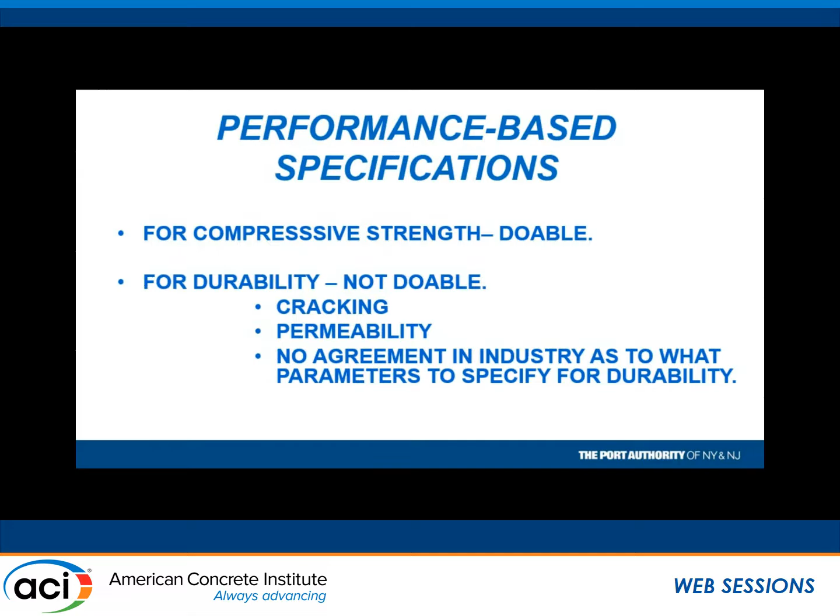I have not found a concrete producer that does any research into this. And they shouldn't—why would they be interested in researching this? They're interested in producing concrete and making some money. So I don't know where they would truly respond to a specification that deals strictly with durability.

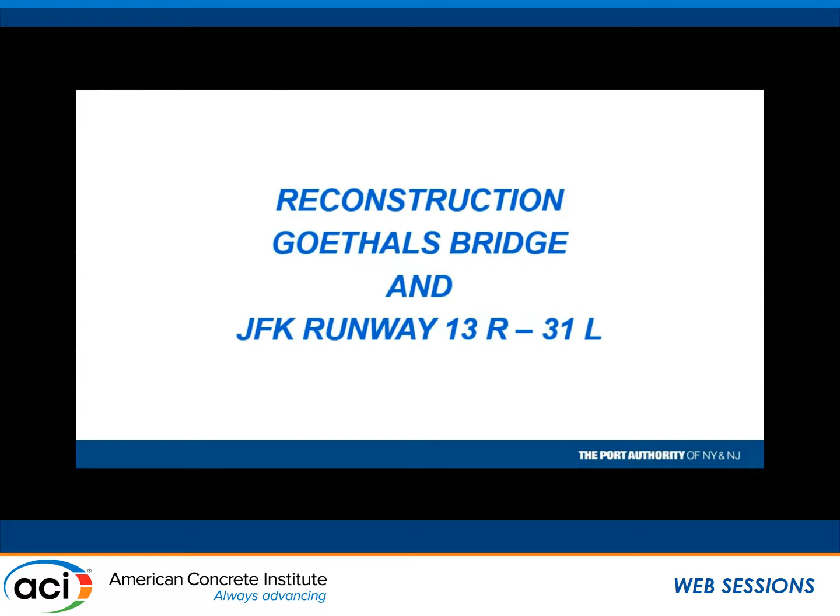So what I'm going to talk about today are two major jobs that we had recently: one was the reconstruction of the Goethals Bridge, and the other was the reconstruction of a major runway at JFK. The first one I'm going to talk about is the Goethals.

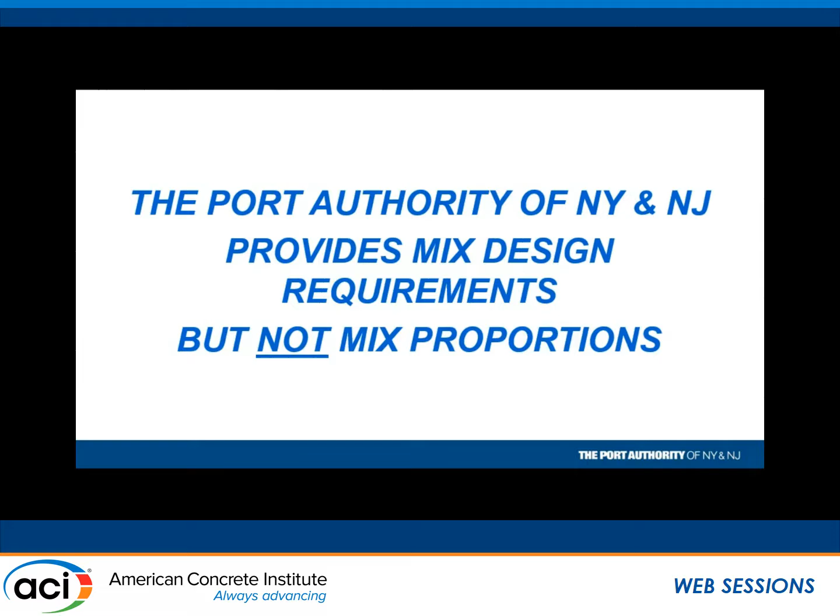Now, we do not give mix designs, okay—that we do not do. We do give mix design requirements. We do put the concrete producer on the hook. We do hold them responsible for what they produce. We even have payment reductions in our contract if we don't get what we want within the PWLs we give. But we do specify a lot more than what would be characterized as strictly a performance-based specification. And why? Because our life experience tells us that we get a better job.

So the Goethals Bridge was designed to have a service life of 100 years. Now, the bridge it's replacing has been in existence for 90 years. The reason it's being replaced is because of obsolescence—the lanes are narrow, we get a lot of accidents—so it's being replaced. The deck there is 90 years old.

So when we talk about getting concrete to last 100 years, people chuckle—oh, nobody's going to be around, ha ha. Whether it lasts or doesn't, who's going to know about it? Well, you know what? It's not a big to-do to get concrete to last 100 years. There's a lot of concrete out there that lasts 100 years. The sad part is that a lot of the concrete I see produced today, I wouldn't give you 2 cents on whether it would last 100 years, because of some of the nonsense we pull.

You go out there—you don't have to be a concrete expert to say, do you think this is going to last 100 years? Are you kidding me? But that's what we do.

Now, how do we get concrete to last 100 years? Talk about a bridge deck in the Northeast—a lot of de-icing chemicals, chlorides. We can't allow the chlorides to get to the steel. If we do, we're going to reduce the service life of that deck.

Now, how do we predict a 100-year service life? Well, we have these programs—ACI Life 365, right? Stadium. And what is it based on? Mostly diffusion characteristics and cover to the rebar. But you know what's interesting? They all ignore cracking. Cracking is not part of the equation.

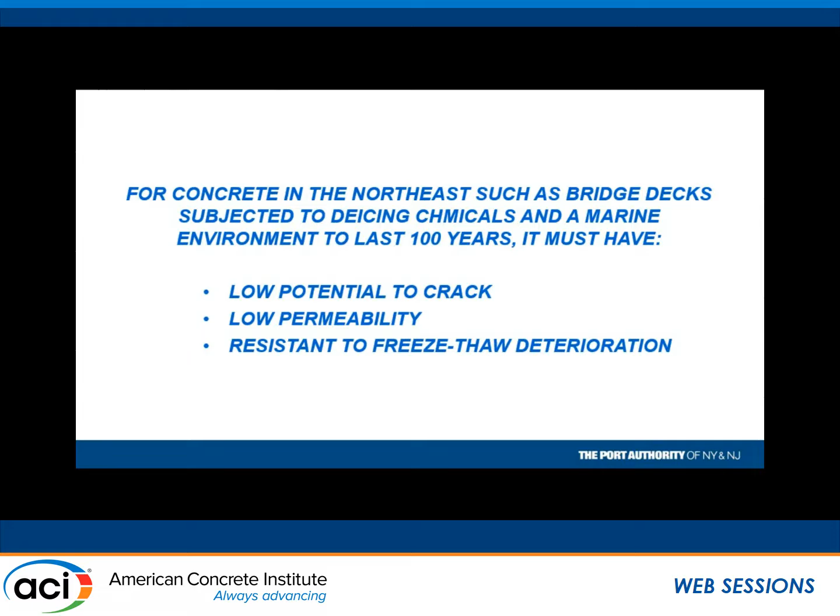So number one, I think we've got to put mixes together that have a low potential to crack and have low permeability. Of course, freeze-thaw durability is not a big deal—put a little air in it and you're good.

How do we build life experiences into performance-based specifications? There are things that we've come to know through working in the industry for 30, 40 years that we found work and others don't work. It's not that easy to put into a performance-based specification, okay? So we say certain things there: you will not do this, you will do this, and you will not do this. They're not just arbitrary decisions we make up just to break the contractor's, you know what—we put them in there because they work.

How we put it in an ASTM specification might be a little difficult. So here's the specification for the Goethals Bridge. Now the Goethals Bridge was a 3P job, private-public partnership. However, we did have enough of our specification in there to exert some leverage on the contractor to give us what we wanted. The prime contractor there was Kiewit, and in my opinion, Kiewit is a very good contractor.

And we had what they describe as concrete wars. I don't think they were that bad. I thought they were discussions where we were talking about the mix designs and what to use.

One requirement that we had on our spec was you will use 1.5-inch aggregate. Now again, people say, well, you shouldn't do that. Well, we have found through the years that the larger the aggregate, the more coarse aggregate you have in there, the less cracking you get. This isn't something that we need to research too much anymore, and yet there is a great reluctance to do this. This turned out to be an unbelievable wrestling contest with the contractors.

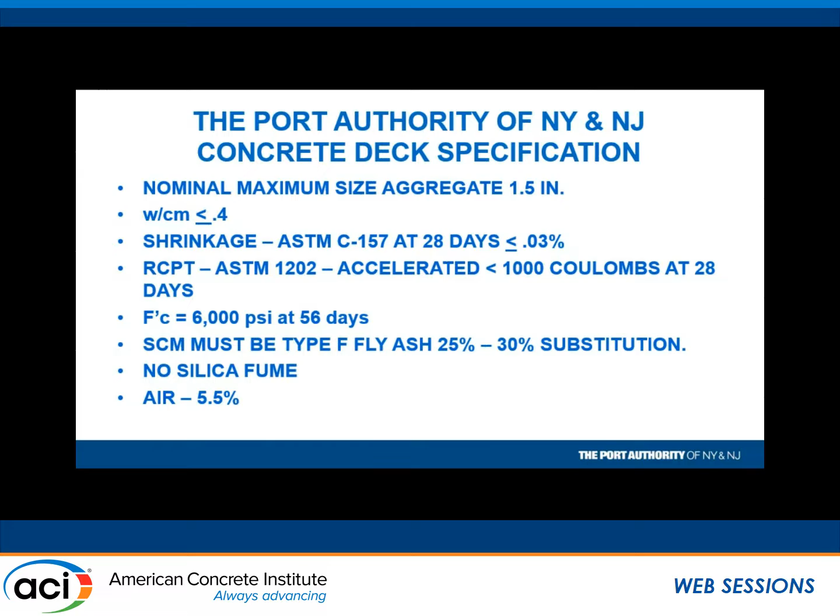And again, I kept asking, well, what the hell do we need it for? Give me a good reason. I never got one. So anyway, we talk about how do we spec shrinkage. Colin said, spec it. All right, here you go. Here are the tests - here are the two that are used in the industry.

C157, maximum size aggregate, 2-inch. I'll show you the JFK runway - we have up to 10% aggregate retained on a 2-inch sieve. Does it make a difference in the shrinkage test if you have 2-inch aggregate? I think it probably does. So is this a good indication of shrinkage? The restrained ring shrinkage test, maximum size aggregate, a 1/2 inch. If all this is supposed to do is give you an indication of the paste shrinkage, then maybe it's worth something. Diffusion, ASTM 1202.

Again, we decided to go with an accelerated test because nobody wants to wait 90 to 120 days to get Coulomb numbers below 1,000. If you stick with the 28-day requirement for 1,000 coulombs, you're going to have to put up with accepting silica fume or metakaolin. So we said, well, there's no way we want that.

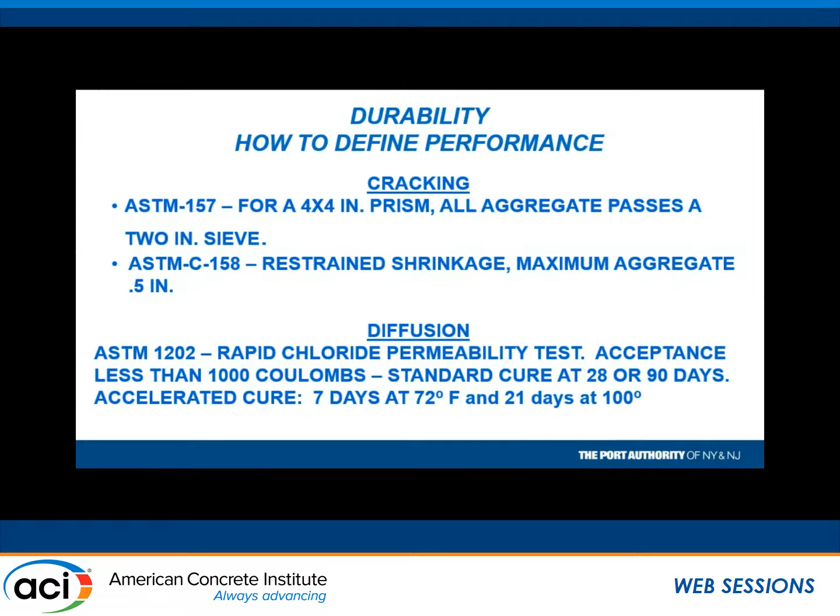So we went with this accelerated test, and we do this on all our jobs now: 7-day curing at room temperature, 21-day curing at 100 degrees. People say that should mimic the life of that concrete in 6 months. I don't know if it does or doesn't, but when we've cored concrete in place, even on this Goethals Bridge, 6 months, a year out, for whatever reason we had to take cores, the Coulomb counts on those cores were always less than 500. So this is not a bad test to give you an idea of how impermeable that concrete is. Coulomb counts below 500 are pretty damn good in my book.

So here are the requirements for the Goethals Bridge deck: 6,000 PSI concrete, shrinkage in 28 days, Coulombs, again the accelerated test, less than 1,000 in 28 days, and you had to use 1.5 inch aggregate, no ifs, ands, or buts.

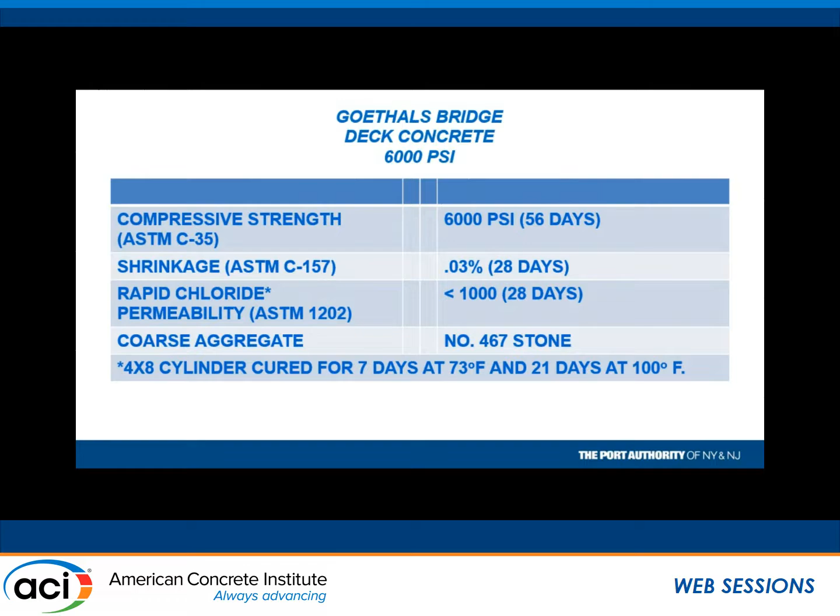Now, people talk about, well, in urban areas, we don't have the room to set up bins for aggregates, so that's why it's difficult to blend aggregates in New York City. Well, every asphalt plant in New York City has 5 or 6 bins for blending aggregates, because in asphalt, if you don't blend, you're not going to get asphalt that's going to stand up to any kind of traffic.

I think we haven't done it in the concrete industry because we didn't have to do it. But if we really want to produce concrete that's more durable, less prone to cracking, blending aggregates is certainly the way to go. It's the most economical way to go. And hopefully the industry goes in that direction.

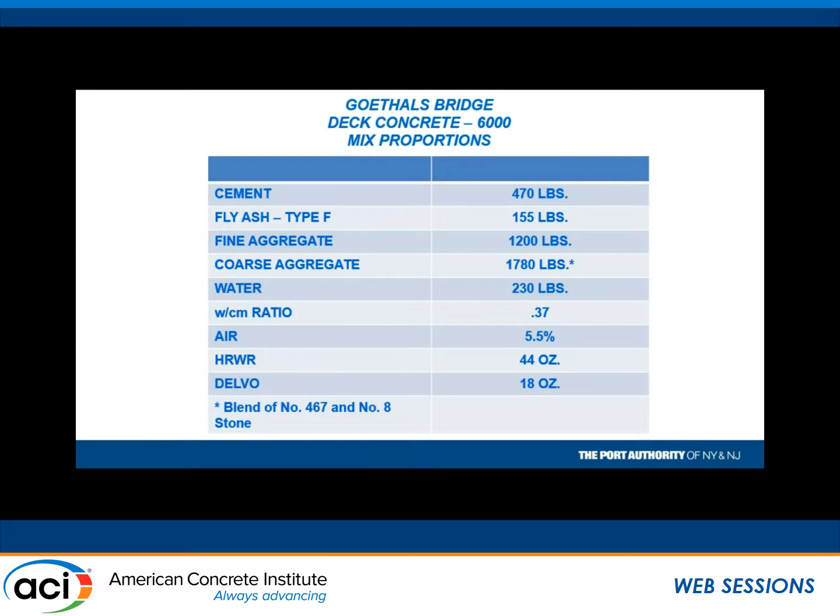We've worked with some of these mixes with the fly ash, the silica fume, and the corrosion inhibitor in there. It's a job for the contractor to finish it. And again, you might have concrete that has very low permeability, but if you've got cracks every 6 to 10 feet, what have you accomplished? I don't think you've accomplished anything. So again, this is the mix that we used, and it turned out very good.

Here are the results. Compressive strength, 56 days, 8260. As I said, I don't think we needed the 625 pounds of cementitious material. If you just extract how many PSI we got per pound of cement, we could have taken out 75 pounds of cementitious material, and we would have been at 7,200 PSI. So we certainly don't need all that paste in there.

Again, more paste, more potential for cracking. If you're talking about bridge decks, you want to reduce the amount of potential you have for cracking so that you don't give a direct conduit for water to go through a crack right to the rebar and start the corrosion process from day one.

And there was the water cement ratio that we actually got, and that's the other thing that we do. We do use the microwave test in the field with every sample that we take to determine water content, and people say that test method doesn't work, it's whatever. There's several stories out there. We've been using it for 20 years, and it does work.

I was talking to an engineer from Europe. He said that they have a test in Europe similar to the AASHTO T-318 test, and he said they use it and it works. I don't know why in this country it doesn't work, but it does work in New York City. It works on our jobs, and this is a job that we had with Kiewit. If this test did not work, Kiewit's got some brains in their organization, and they certainly would have put the boots to us, as would have many other people. 20 years we've been doing this test, and people still claim it doesn't work.

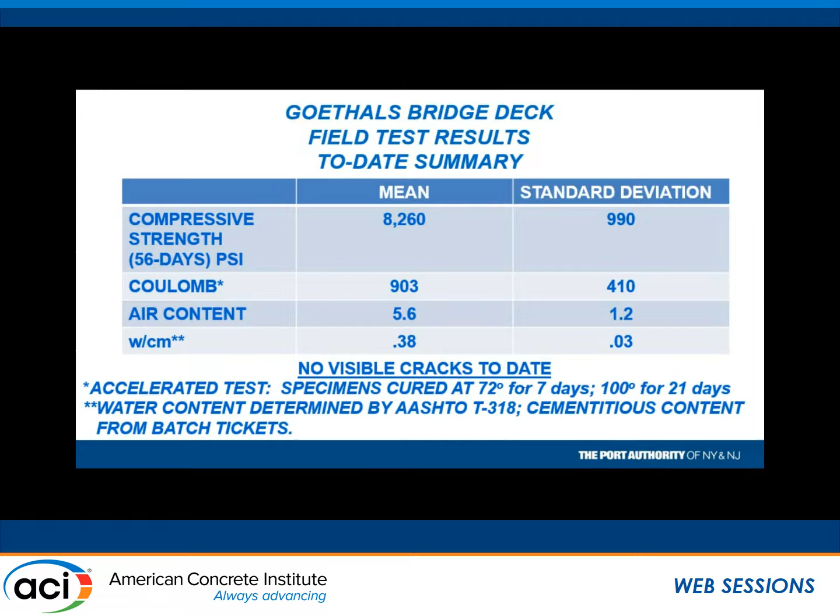We have too much emphasis on strength and not the properties that really matter. Whether that concrete is 8,000 or 5,000 psi, nobody would miss it. But if you've got a lot of cracks in it, you're going to have poor durability, poor service life in that concrete. And of course if the diffusion is high, that's not going to work either.

So here it is - this concrete couldn't be pumped. Here it is, it's pumped. All of it was pumped. There it is being placed on the deck, and it finished very well.

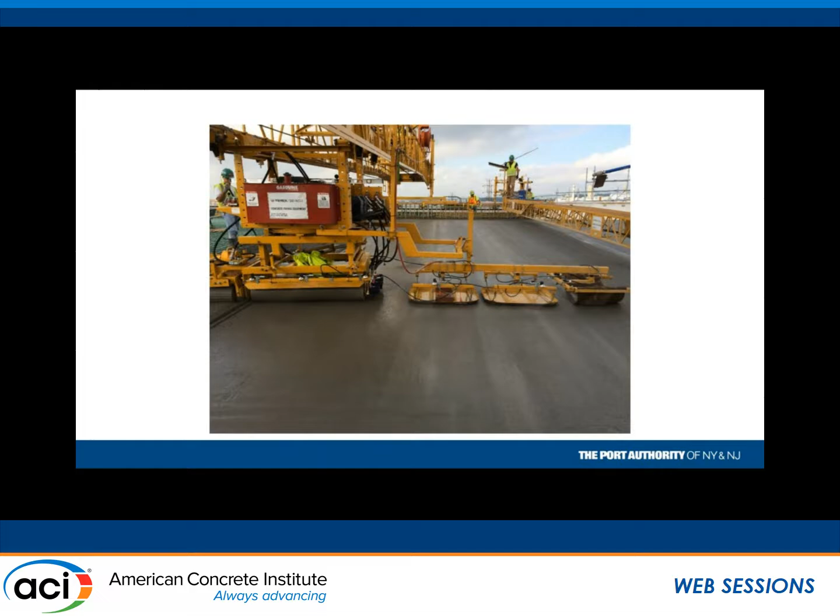Finishability wasn't an issue, but I got to hand it to Kiewit - they did a great job doing a mock-up and working out the kinks. They're a great contractor. And here's our curing method.

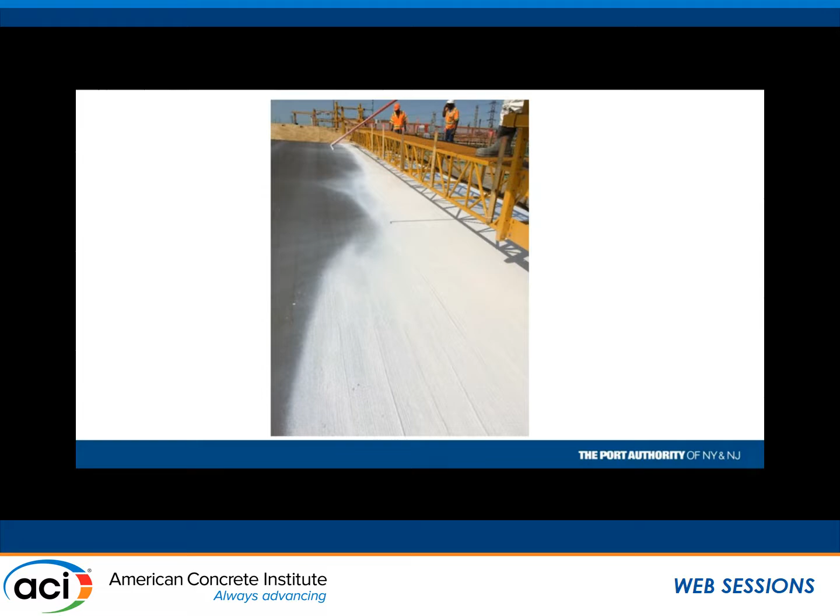We put the curing membrane down first. As soon as the sheen has left the surface, we want the curing membrane put down. Acceptance is the entire surface has to be white, just as you're seeing in this slide. Then once we get final set and we can walk on it without marring it, we put the water curing on there. I'm not sure how important this water curing is anyway, but we did water cure it.

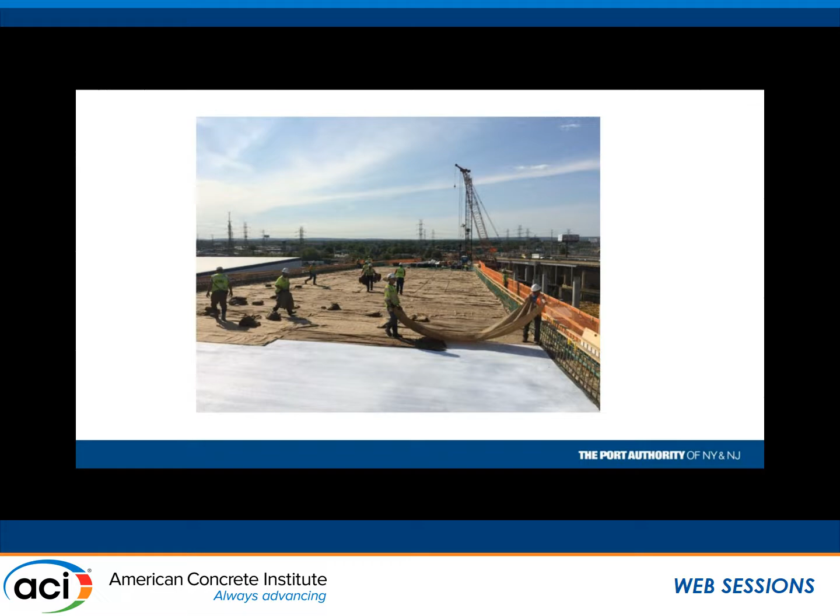The other job I'd like to share with you is we reconstructed 2 runways at JFK. The reason we used concrete is because the managers of the airport got fed up with repaving with asphalt. And the driver was the quality of some of the taxiways we built out there - they had no maintenance issues with them. They wanted concrete.

We said to them, we're going to give you a cost benefit analysis of asphalt versus concrete. And the manager of the airport said, don't waste your time, I'm not interested in asphalt, I'm not here to repair pavements. So the point I'm trying to make is if we do quality work, people want it, especially for airports.

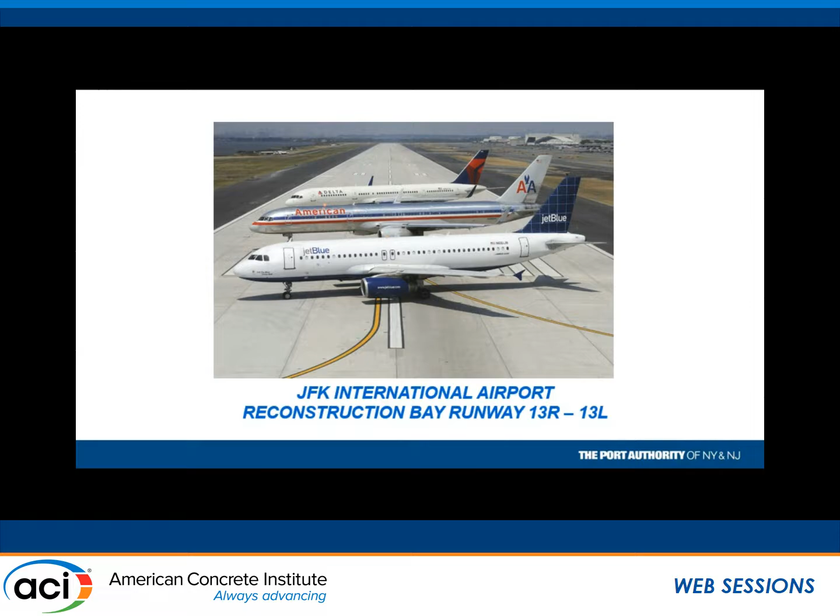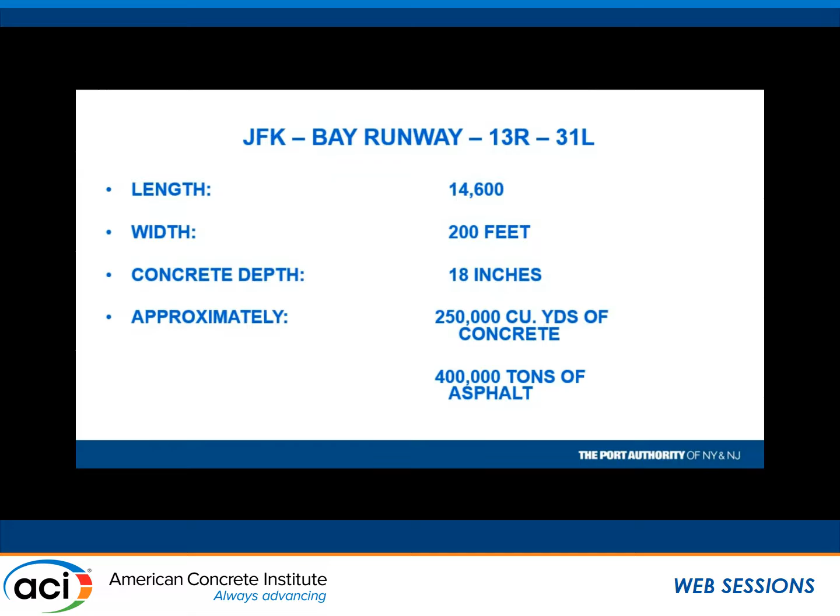This runway is almost 3 miles long. It's the longest runway that we have in our system. 250,000 yards of concrete were placed, and quite a bit of asphalt too.

Here again we have to abide by the FAA spec. But I met with the FAA and said, listen, we want to take some exceptions to your specification. They were about 2 pages long, because we don't think what you've got there meets our requirements. So, water cement ratio less than 0.45 - that's industry standard, nothing peculiar about that.

Low cement content - the reason we said maximum cement content is because there's a trend to put in more cementitious material than you need, for whatever reason, I don't know, it must be very cheap out there. So we wanted a green concrete. And green concrete doesn't mean that you put in 40% slag and a hell of a lot of cement in there. Green concrete means you minimize how much cement you have in there. So that's why we put in a maximum of 350 pounds of cement, maximum cementitious content 550, which we don't even need if this thing was done right with the right aggregate gradation. But we cut them a little slack.

And here we go - substitution for supplementary cementitious material. For bridge decks we say we want fly ash. For pavements we want slag, because we get great results with the slag, and because of the control joints we don't get cracking. So here we mandate slag.

Total aggregate content more than 70%, and we want large stone in the mixes. This is always a point of contention with the contractors and the concrete producers - they don't want to do this. So you talk about performance-based specifications - what would we get if we didn't insist on this? Why do we insist on 2-inch stone or better? Because we produce concrete that doesn't have cracks in it.

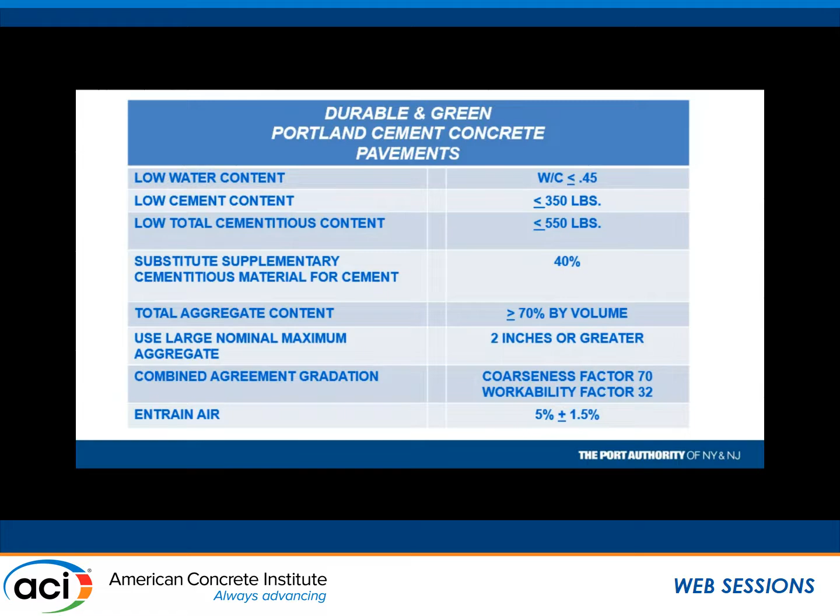So again, here are our requirements for the aggregate: coarseness and workability factors, but we're willing to listen. But we do have requirements or specifications to push this up to have a lot of coarse aggregate and large stone in the mix.

We also met with the FAA and told them we don't think it makes sense to give a bonus of 6% if you get a flexural strength modulus of rupture greater than 700 psi. We don't think that's worth much at all. Getting 700 psi isn't an accomplishment if the durability isn't in the concrete. Who cares whether it's 750, 850, 950, 1050? If you've got a lot of cracks, a lot of spalling, we don't think the contractor should be given a bonus.

So we said the water content must be where it was supposed to be by mix design, confirmed with the microwave test, and the air has to be where it was specified. The other thing we added was the rapid chloride permeability test, for one reason only: to make sure the pozzolan was in the mix and wasn't left out by accident. So that's why we have that in.

Again, to have pavements with low permeability isn't a bad deal. It's not as important as for a bridge deck, but we wanted to make sure the pozzolan got in there. It gives you protection in case you've got some aggregate that's reactive. If you have 40% slag, 30% fly ash in there, it's not going to be as reactive, and you're not going to get runways that blow apart in 7 or 8 years, as some of us have heard is happening in other parts of the country.

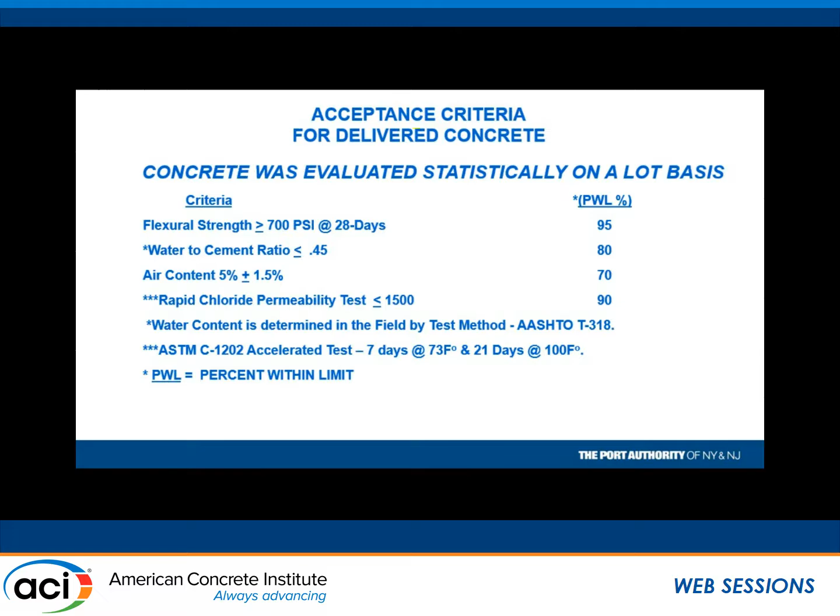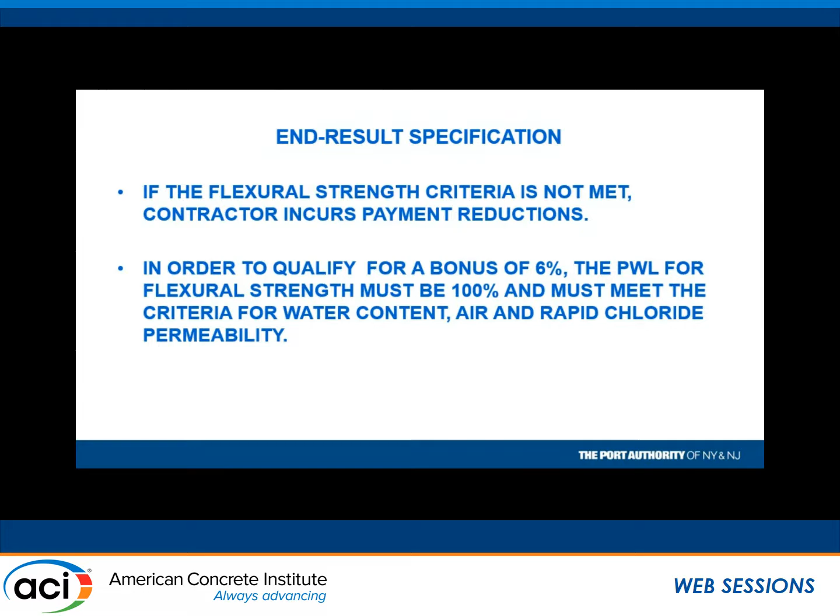The FAA said that's not fair. They made a deal with, I guess, the Portland Cement Paving Association that if you got over 700 flex, you'll get a 6% bonus. We said, well, we don't want to do that. We're not going to give them a bonus unless the water, the air, and the durability are where we want them. So they reluctantly agreed to it, though they said we're raising the bar too high.

So here were the results from that job. The contractor got over $1 million in bonus money. No lot of material failed to meet the 700 psi criteria. 83% of the lots got a bonus, even requiring that the air, the water, and the diffusion be where we specified. 83% of the lots.

So the point I'd like to make is that we need to raise the bar. If we accept material that's marginal, that's what they're going to give you. No one's going to pick the bar up on their own. If you don't pick up the bar, no one's picking it up for you. So this is what we got.

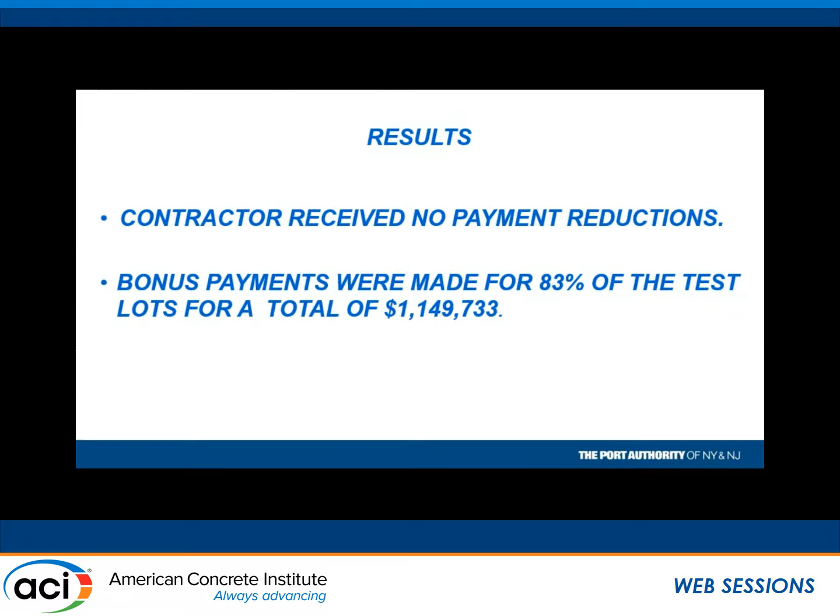The FAA saw our data and said we need to get together. I said, what do we need to get together about? We've seen a lot of your data, you keep getting 1,000, 1,100 flex. I said yeah. They said, if we could somehow repeat that across the country, we could reduce the thickness of the pavements by probably 30%. I said okay, whenever you want to get together, I'm available. I'm sure I'll be retired before we get together, but it's a good idea.

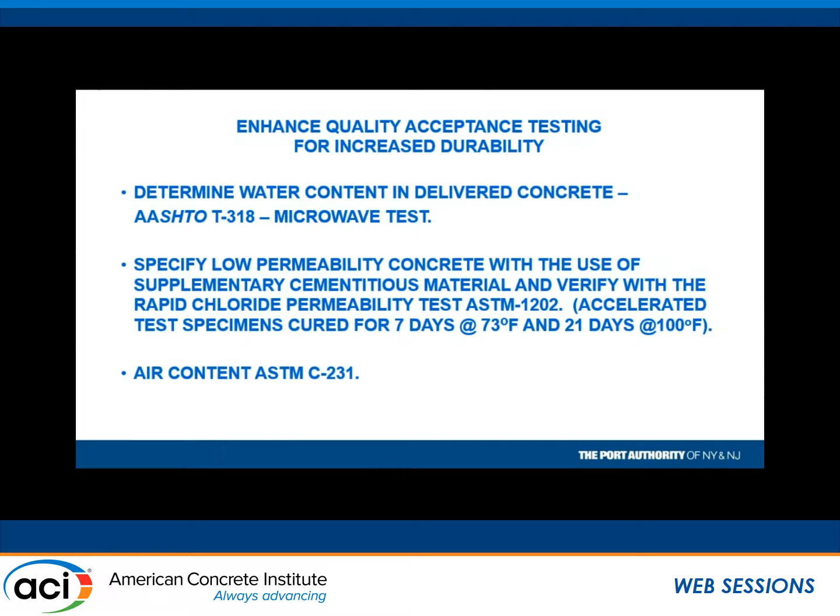Again, I want to emphasize that we do check the water content of the concrete delivered. We do that on bridge decks and for our pavement concrete. There's a microwave oven with a generator in the field, and of course it is cumbersome, it does take some time. But if we're going to be rebuilding our infrastructure, we should try to do it right.

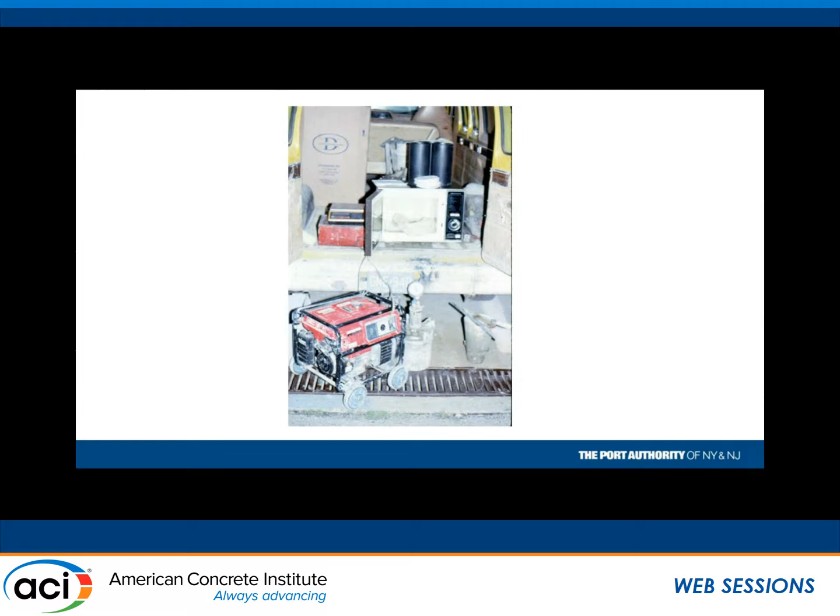Doing the slump test doesn't quite cut it. You could take the slump test and sit on that cone as far as I'm concerned, and never do that test, it would never bother me one bit. It's a worthless test, I think.

And we added one more requirement to the FAA. We said, your 20 by 20 for control joints, we don't like that either. We're going to go to 25 by 25. And we're going to add another caveat: if any of the concrete cracks before we load it, our spec says the contractor replaces it at his cost. And they said, wow, how could you do something like that? Well, just watch. Here's how you put the words in the spec.

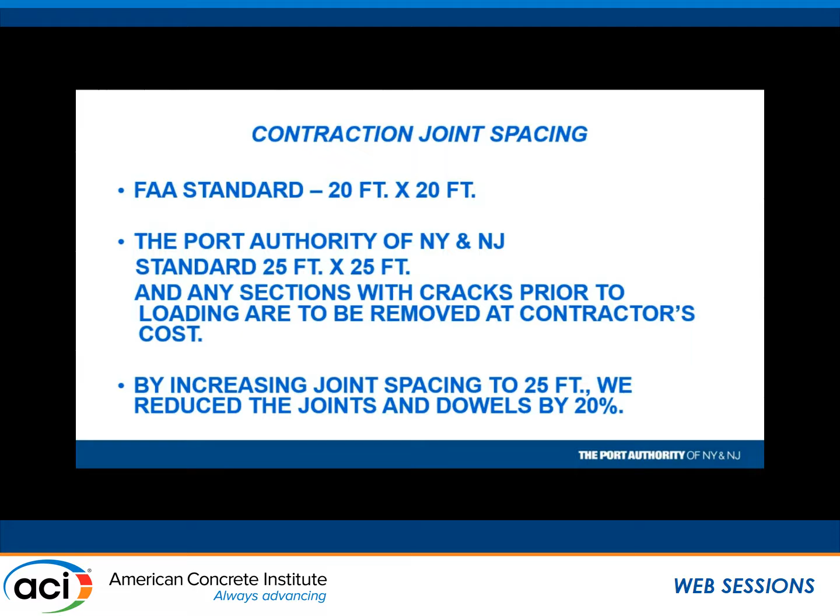And we did that. And it turned out very good. There were roughly 6,000 slabs for that runway, 25 by 25. Only 31 were removed because of cracking prior to opening. Almost half of those were in one night's work where they forgot to cut the control joints. If you don't cut the control joints quickly, you're going to get cracks.

So the moral of the story here is we kept the water down, we kept the aggregate large, we maximized the aggregate, and we minimized cracking.

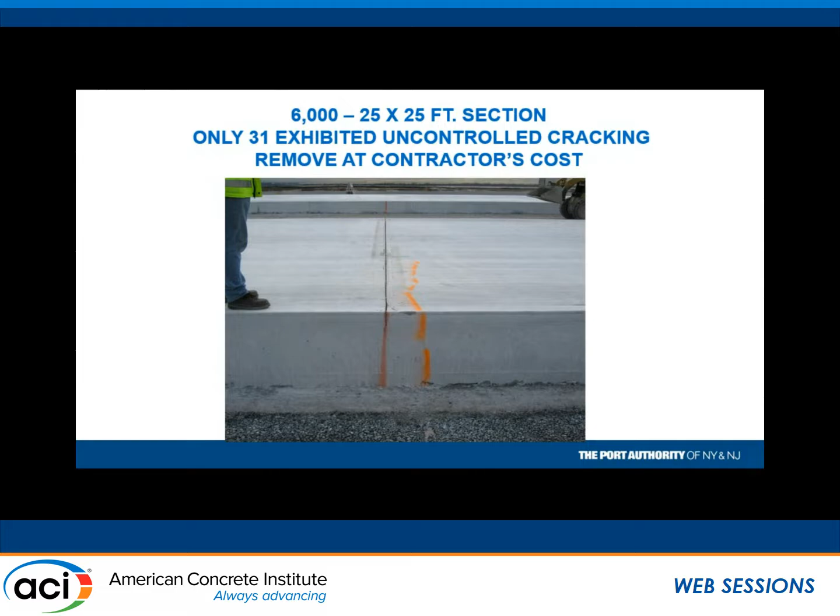I gave a talk in Milwaukee, and there was a young engineer from the FHWA who said they were awarding a research contract to see how we can change our mixes to minimize cracking in slabs 20 by 20. I almost choked. I said, you're spending my money on that? You don't know yet how to do that? It's amazing, we go round and round. We've been doing it now for years, and it's working good.

So here we go, this was a real success story. And here's the mix design. Again, we said maximum 550, and we got maximum 550 — nobody went any lower. There's the mix design, and here are the results.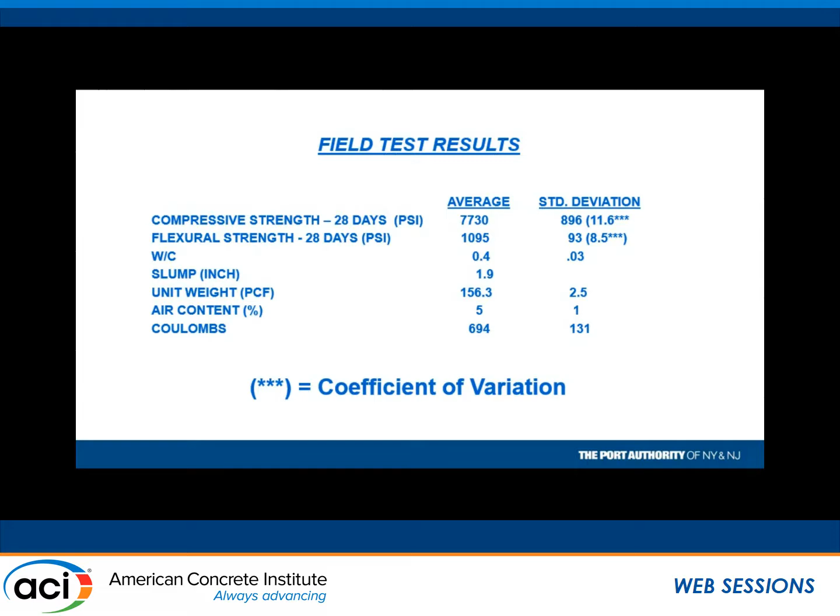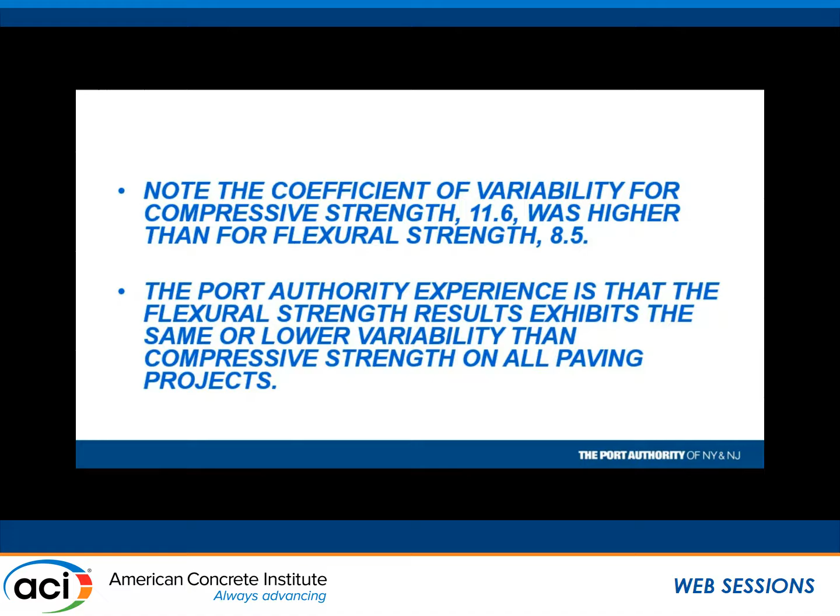And the air content and the coulombs, of course, were not an issue. So I think it was a great job. And again, what was interesting is that the variability in the C39 test was higher than the C78 test. Some myths in the industry are that the C78 test has a lot of variability — not by our testing, unless we're making up numbers — and that the AASHTO T318 test is not good. Well, I beg to differ with you.

I don't understand how we can be rebuilding our transportation infrastructure and never testing for water content. If you look at 318, durability is tied to water. How do we do this without testing for water? I don't get it. Maybe somebody can explain it to me. There's a lot of good people here — explain it to me how we do that.

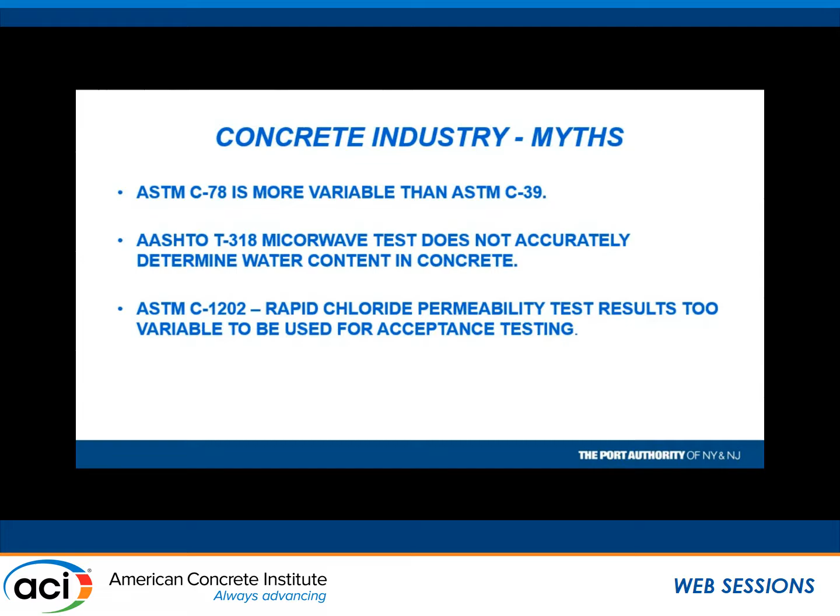The rapid chloride permeability test — if we're looking at diffusion values, how do we not do that test when we're sampling concrete for bridge decks? How do we just do compressive strength? Who cares, compressive strength is not a big deal — if you can't get 5,000 PSI concrete, you might as well hang it up. You saw we got 7,700, and we were looking for 6,000. That's not unusual for us to get numbers like that. If you control the water, control the air, the numbers go through the roof. That's our experience. So I think that's where we need to go, and whether we go or not, who knows.

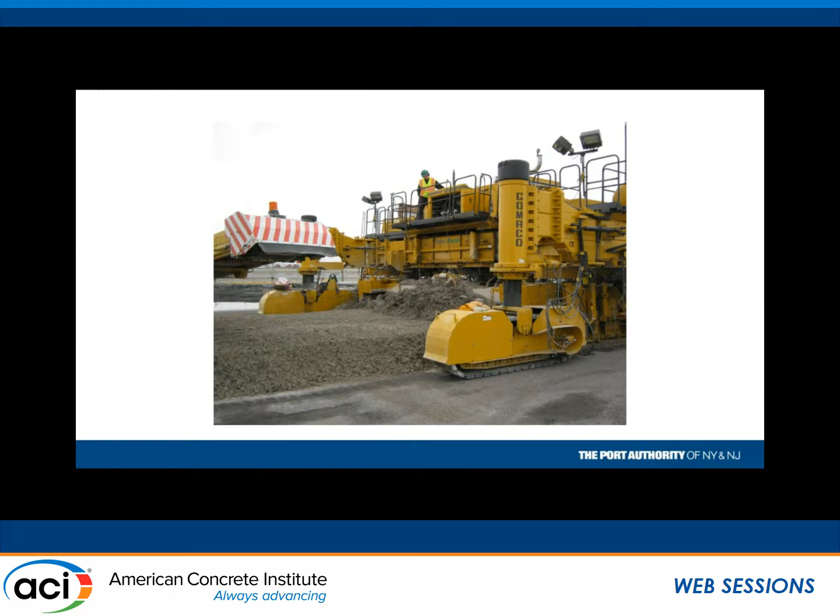So here's just some shots from that job. That's the mix — as you can see, it's rather bony. This was slip form for the most part, all slip form concrete. And you can see it stands up very nicely. That rock does lock into each other.

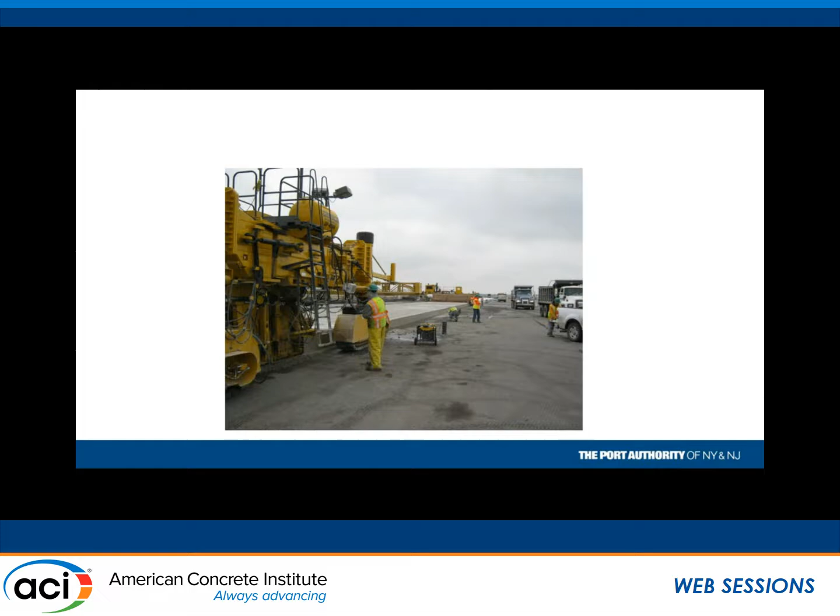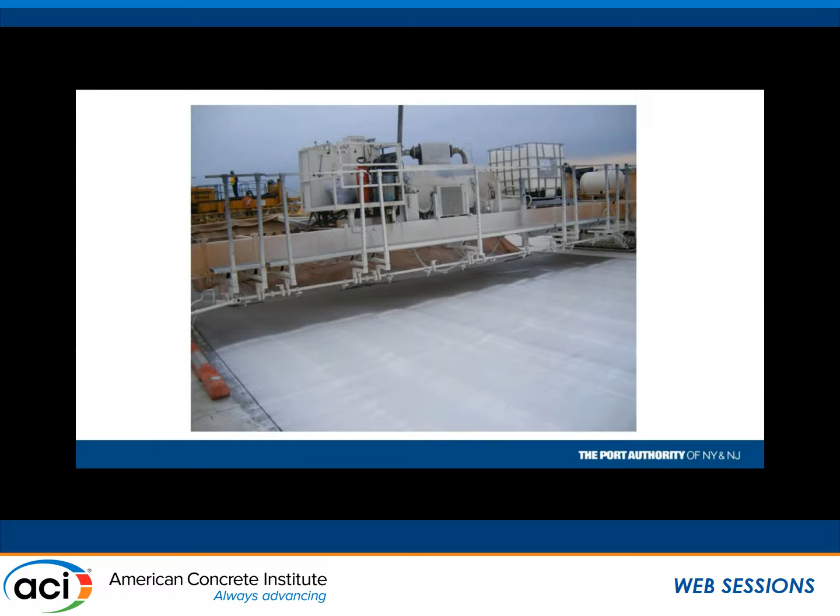Just some, and again, all cured with membrane curing, and it works very well, so long as you get it down quick and the entire surface is white. You certainly don't need to wet cure any of this.

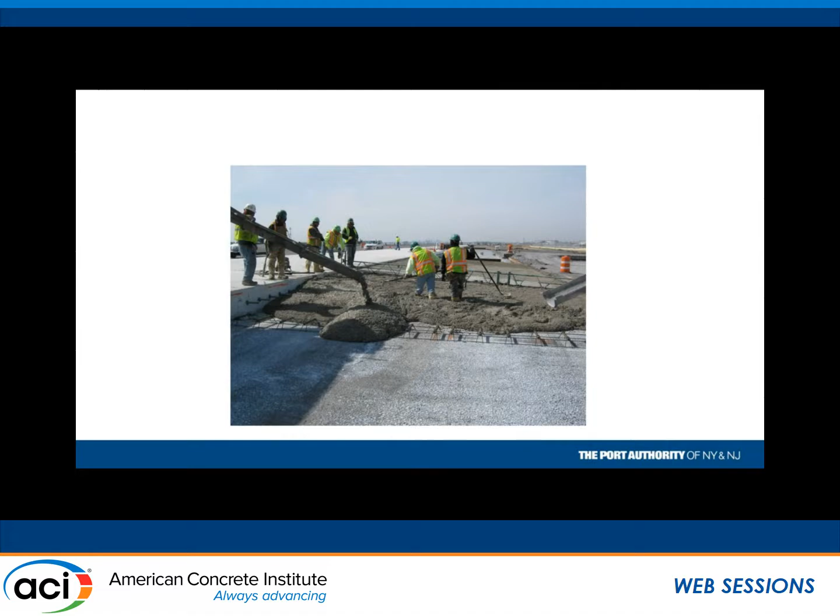We also used the same mix where we had irregular sections. We added some more high range into the mix and finished it conventionally. So that's the same mix, just with more high range in it. And here's the job, and it turned out very good.

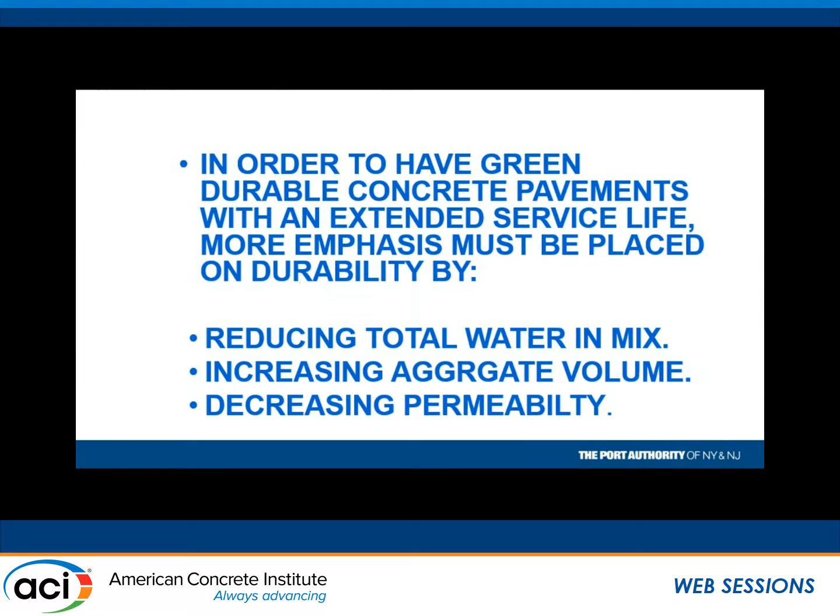And again, I think if we're going to have green concrete, if we really mean that, you need to look at how much water you have in your mix so you drive down the cement factor. If you just liquor up the mix with water, you're not going to drive down the cement factor. We could drive it down by increasing the aggregate content and having a well-graded aggregate. I think in both cases we will decrease the permeability and decrease the potential for cracking.

Thank you. Yeah, I guess.

Nice talk. You looked at controlling cracking only from the perspective of the design mix. I was wondering what the reinforcement does in all of that. I mean, you looked at controlling shrinkage cracking only from the design mix of the concrete. My question is what role the reinforcement plays in all this. We know that reinforcement can restrain or even cause shrinkage cracking. What's your thought about that?

Well, for the runway, there was no reinforcing steel. For the bridge, yeah, certainly the reinforcing steel helps, no question about it—it keeps the cracks tight if they do develop. If your question is does the reinforcing steel eliminate cracking, I'm not sure that's true at all. I've been to many jobs where we had as much reinforcing steel as here, and truthfully the deck looked like somebody dropped it—that's how much cracking was in it.

So again, it's not just all mix design. I certainly want to give credit where credit is due. We had a good concrete supplier, a very good contractor, and there was good collaboration between everybody—much discussion on, we're doing this, we're doing that, how about this, how about that. That's what made it work: the collaboration between all parties. It's just not mix design. But if you start out with a lousy mix design, you're doomed. I don't think you stand a chance of producing anything that's not going to crack. And we've been down that road before.